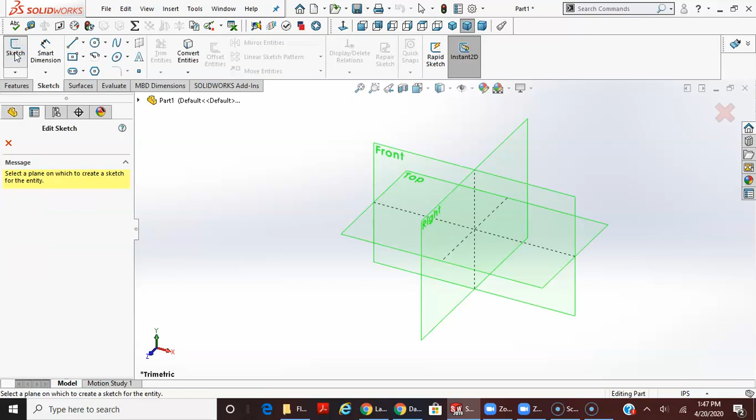Make sure I'm in inch here. And I'll start from the sketch. The orientation and the origin don't matter. For this one, I'll start with the line function. And I'm not going to start on the part origin. I'll just start off the part origin. And I am not going to make the fillets. I'll make the fillets on the bottom.

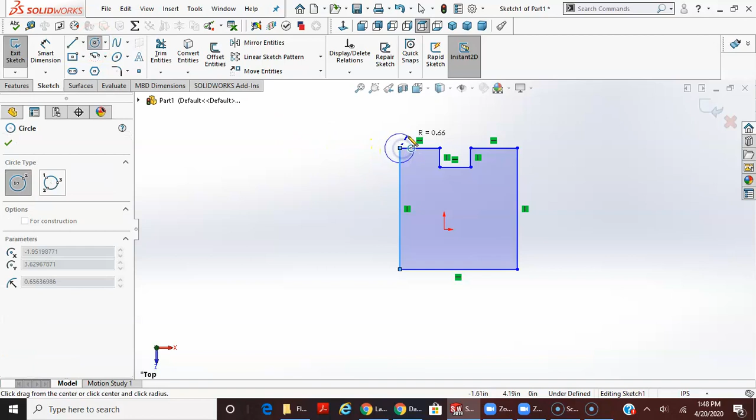I'm going to start with, again, the profile. And I think on this one, I'm going to make the slot like this and actually make just the rectangle like this. I'm going to go ahead and use the circle function to start. This might not be the best way to do it, honestly, because I'm going to have to trim this up. So we'll see, and actually I'll put another circle in there as well. So just like that, looks pretty good.

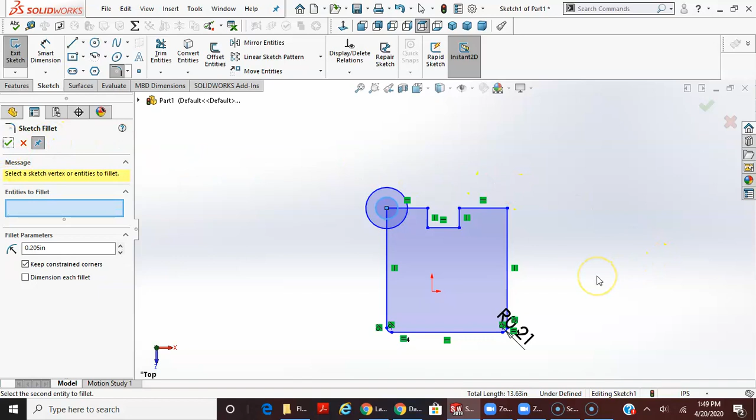And I'll use the sketch fillet function. The radius is 0.205 on the drawing. And I just select two lines. And that's pretty good. Now, even before I used the sketch fillet, I probably should have smart dimensioned the overall length here as 2.5, because now it's going to shrink a little bit. It's not too bad, so let's do it this way.

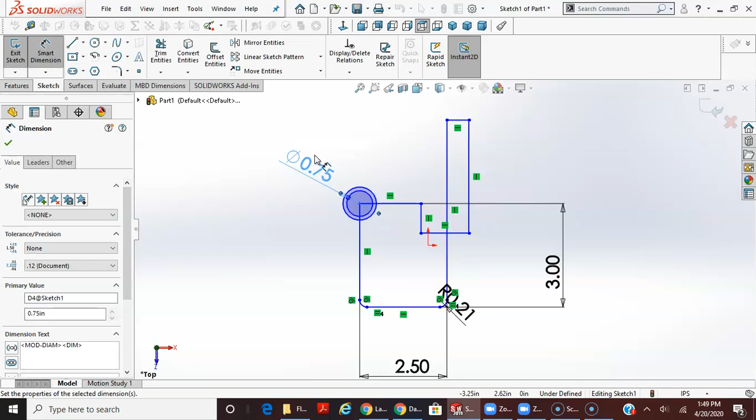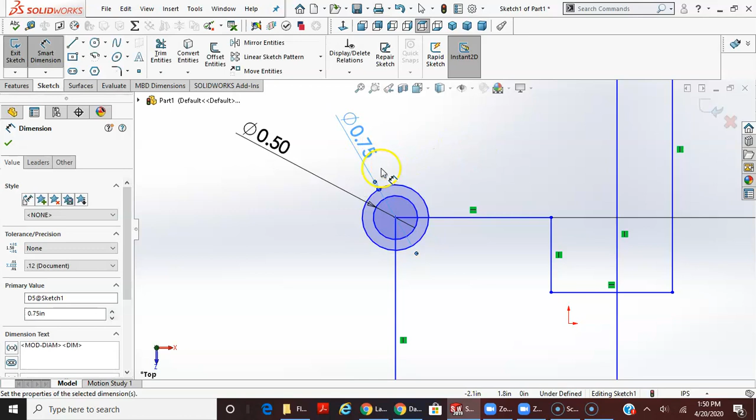I'm going to dimension the overall height as 3 inches. And then I'll go back in, and even before I move these lines, let's dimension these diameters. This is 0.375 times 2 is the diameter. This middle one is the diameter. Oh, I think I selected the same one. This is incorrect. This is 0.5. Well, I guess it doesn't really matter which one you're selecting. This one is 0.375 times 2, so 0.750. And then I have the overall height, the overall width, and then escape out of the dimension tool.

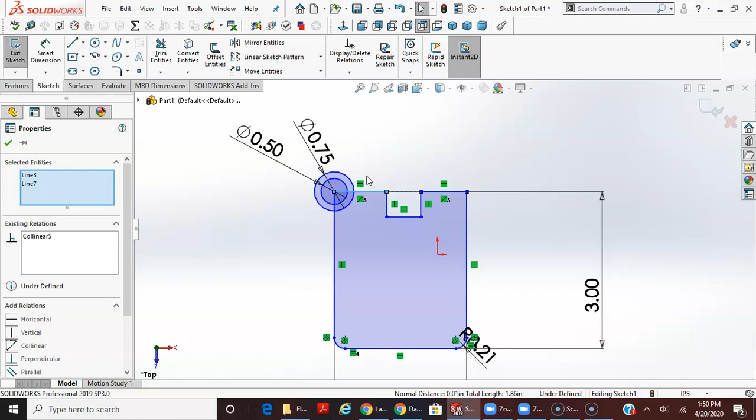And then I'm just going to drag this rectangle over and this line down. And I'm going to go ahead and make this line and this line collinear. And I'll add a center line from this midpoint here, and I'm just going to put it all the way up the length of the part. I will smart dimension this line length. This is a vertical line. On the drawing it's 0.250.

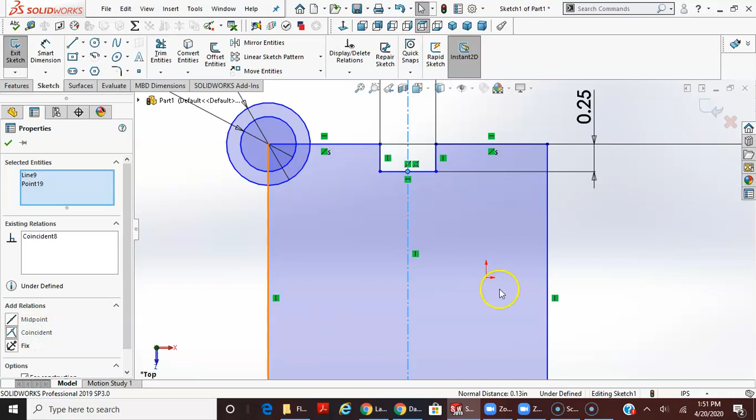And then this is 1/2 inch. And then to center the slot, I'm going to select this midpoint, hold Control down, select my center line, and make those coincident. So this is pretty good. This is kind of all I need, I believe. I am going to trim this up, though, before I fully define this. I think it will actually define okay if you don't trim it, but let's do this trim first. This could be a little problematic, so let's see.

In the power trim function, I'm going to drag, and you can even kind of look at the drawing and see what is the open area. This is open. This is open. And then these two lines also do not exist.

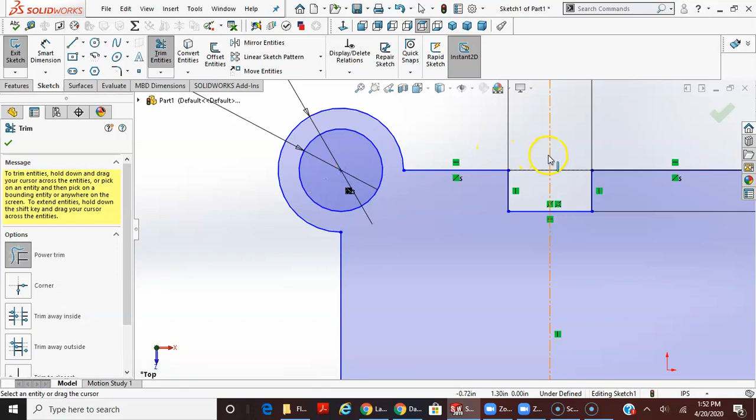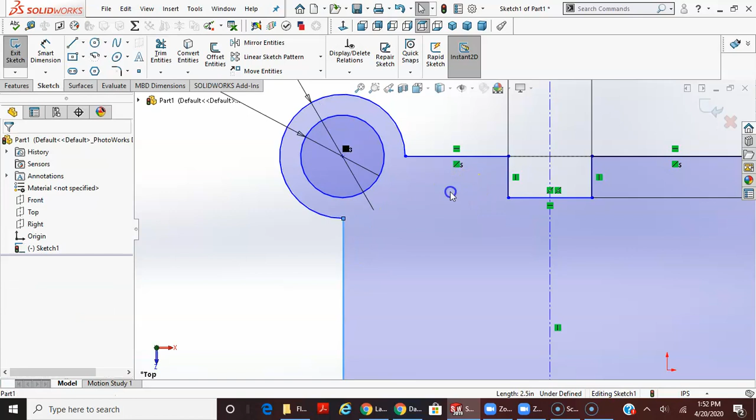Now I'm looking at this, and the sketch relations were eliminated as far as where this center mark is. And you can see I'm moving this around, and actually this center mark seems to not move from this line, but this line was moving. So I'm going to select this line and make this a vertical line and see, will it still move? I think it's pretty good.

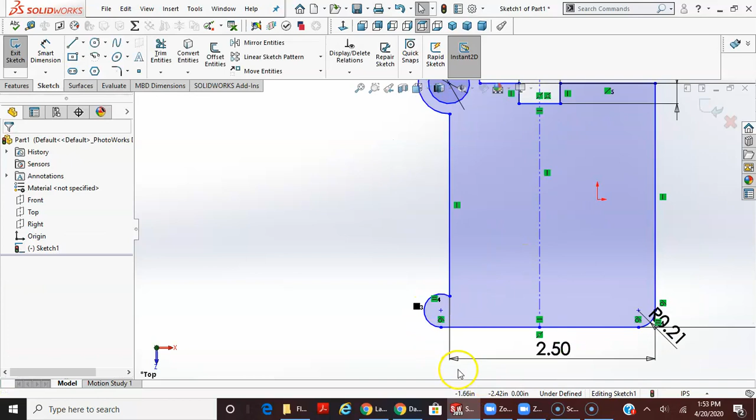The only other thing though is it did seem to change the size. I thought I had a dimension in there for the overall width. So let's add that again. From this edge to this edge was, off the drawing, 2.5. And now down here this looks a little wonky. Why did this move? This makes no sense to me at all.

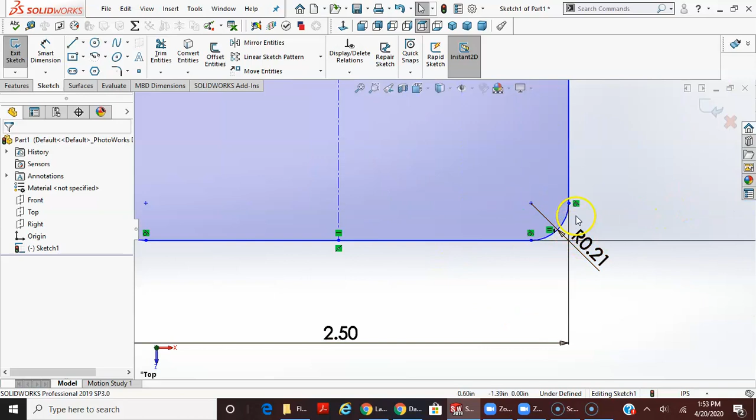Let's add this arc and this line as tangent. And this was equal radius based on the sketch relation. It's dimensioned here and both of these have tangency. So let's do a little screen fit again. I'll move these dimensions down so we can kind of see what this looks like in a better screen fit.

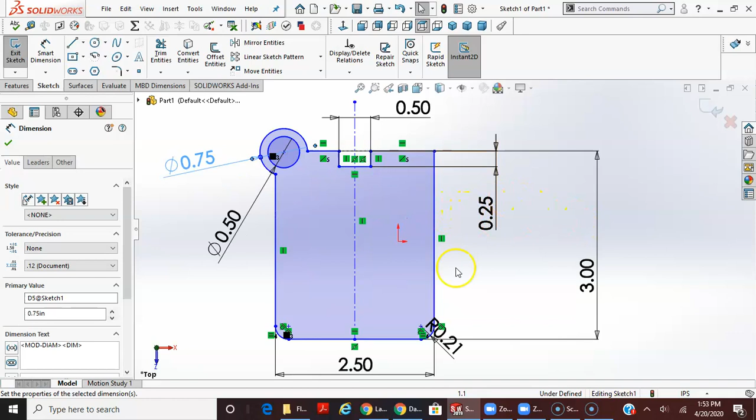Maybe not. Okay. So from here, I will locate this on the origin to define this. And let's see, if I select just this midpoint and this point, and then I'm going to make these coincident.

So it's still underdefined. As far as this edge goes, and this is going to apply on the midterm as well, this center mark, hold control down, this center mark and this line need to be coincident. These arcs are still blue, they're still underdefined. The diameter is defined, but if I move these up and down, you can see that this center mark also moves. So I'm going to add another one.

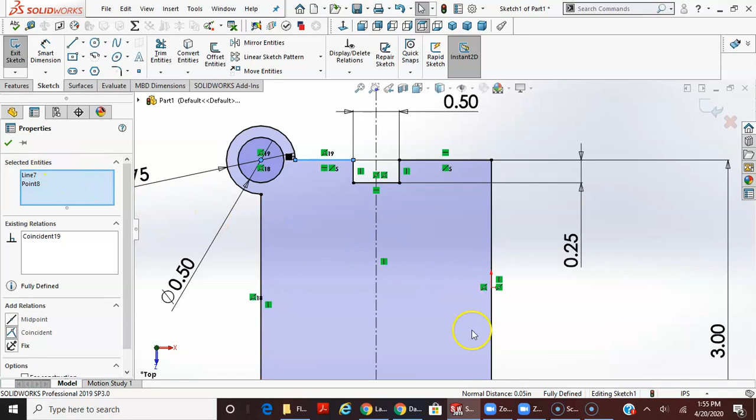It's the same as this coincident point, but I'm going to add it coincident to this top horizontal line. So I'm going to select point, control, line, and make these coincident. So now it shows down here as fully defined. The midterm has an issue like this, maybe even more than one. I think I've got a concave arc, a cutout here or on the other side, and then another circle where the center mark has to be tangent with this edge and this edge.

The position, the location of this arc and this arc is implied. They use the term implied, but you can see on the drawing that this center mark does line up with this edge. If you actually take your drawing, you can fold the bottom edge of the drawing perpendicular to the side edges, where these two lines are collinear, and then it will line up with this center mark both vertically from this edge and then horizontally from this edge.

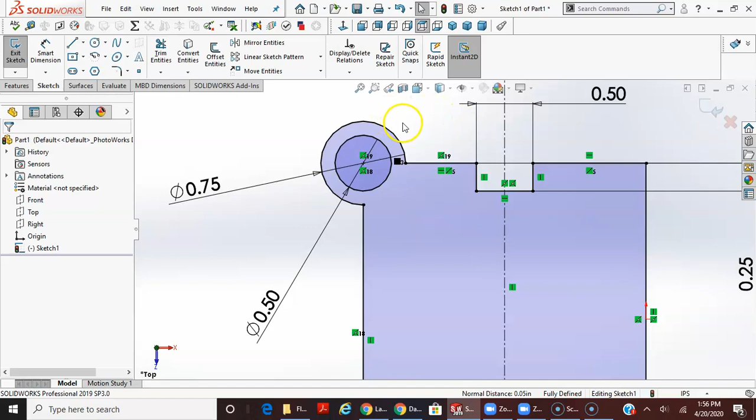I think I spoke a little bit about implied 90s. It's not necessarily implied in this case because it actually shows the center mark, and the center mark does line up, and that's how it's positioned. Both of these features, this inside hole and this outside arc, are positioned based on the center mark lining up with the vertical and horizontal edge. Okay. So this is fully defined.

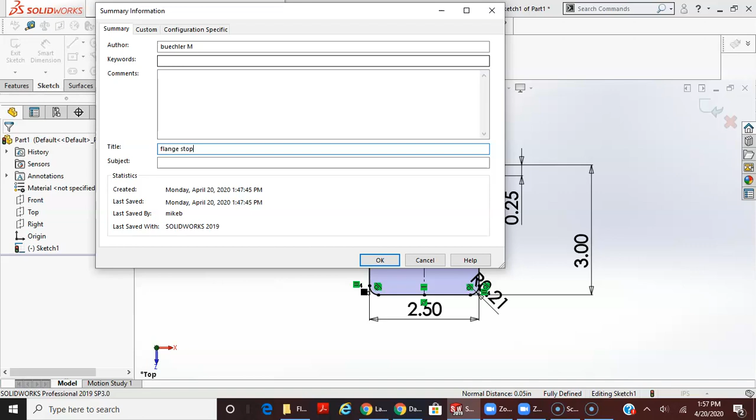This looks good. I'm going to make sure I have my summary information in here. I'm going to title this Flange Stop. And I'll just extrude from here. Features, Extrude. It shows a part thickness on the right side at 0.45, and done.

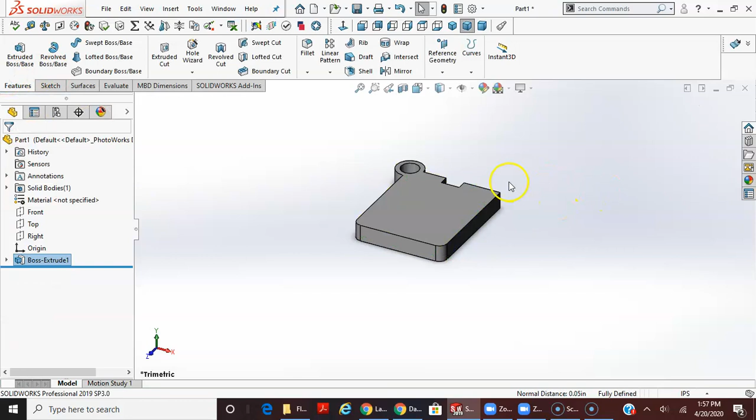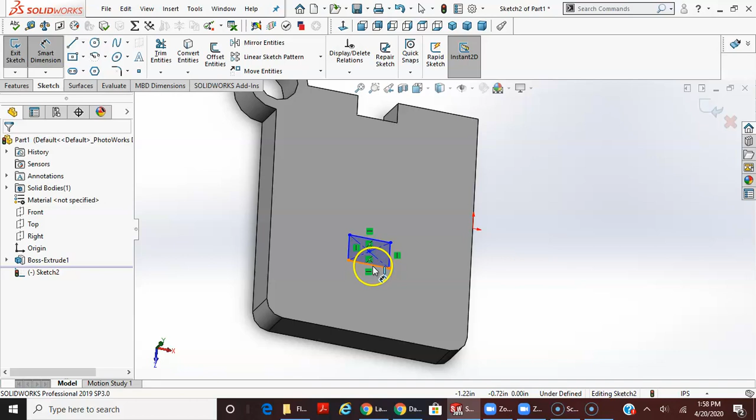Now let's do a sketch on this face, and I can do a rectangle. Let's do a center rectangle. I think I can get away with a center rectangle here. I'm not going to dimension the line length, because I'm going to add the fillets as sketch fillets. So I'm going to dimension it from one line to the other line, not point to point, and not line length, but edge to edge.

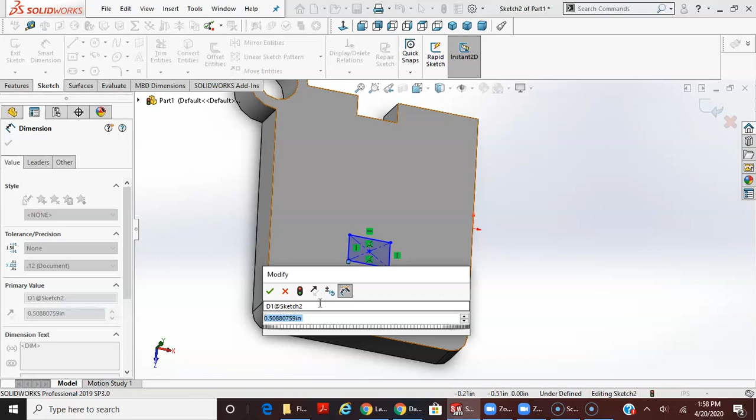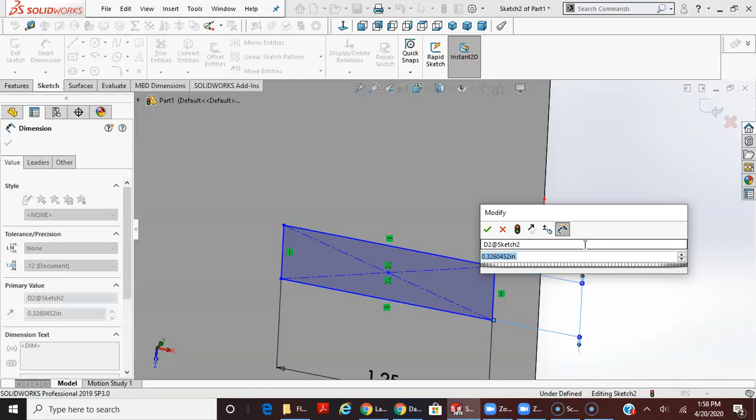1.25 off the drawing. And then the same thing here. Instead of dimensioning off of this line length, I'm going to dimension off of this edge to this edge. And this is shown as 1.25. And then I'm going to add a center line or construction line here from this midpoint. I'm going to make this construction line, this edge, and this edge symmetrical.

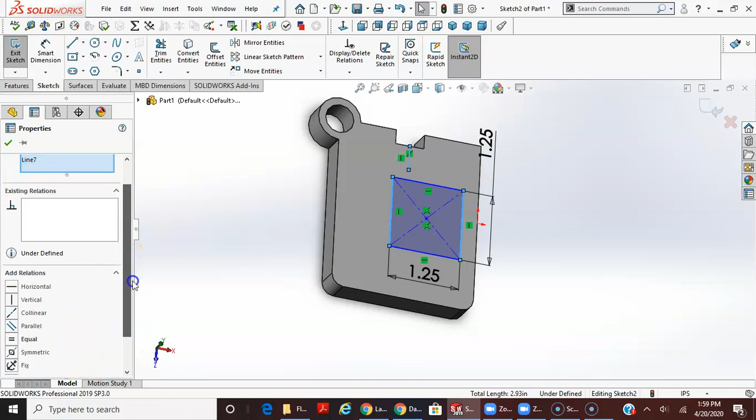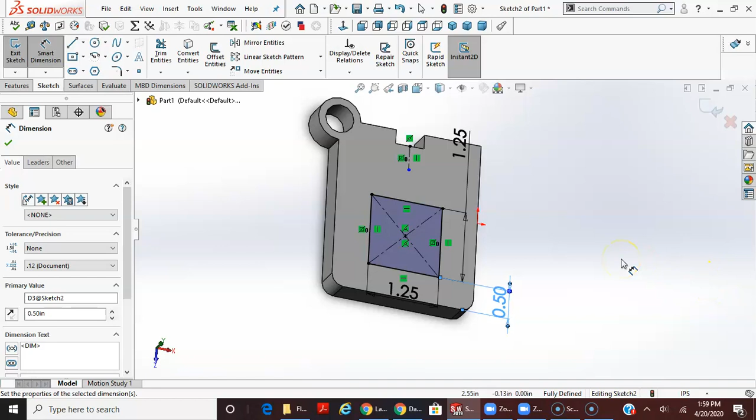So it is constrained now. I have two dimensions and this one sketch relation, so I can't move it side to side, but it can still move up and down. So there is another smart dimension from this bottom edge of my base to here, 0.5. And that looks pretty good. Now this is fully defined.

I think I had an issue with my recorder. I hope I didn't. Okay. Oh, come on. This thing. Okay. Yeah, it seems to be recording. So,

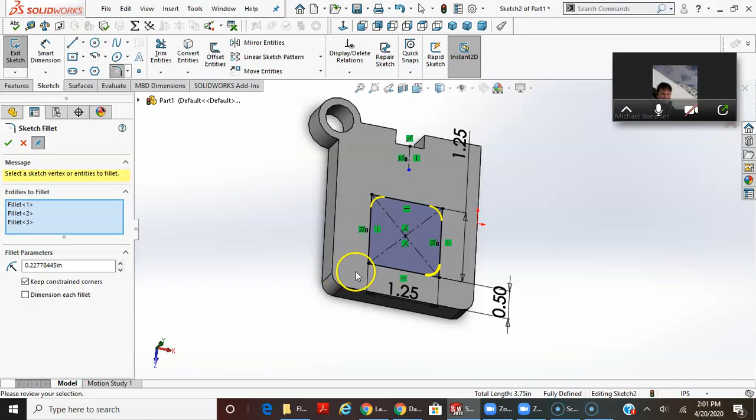I'm going to add the sketch fillet here, with a radius of 0.23. I think I dimensioned these edges a little differently. It's asking me to enter entities to fillet. Can I fillet the whole profile? Oh, edge to edge, edge to edge, edge to edge. Excuse me. Edge to edge. 4 fillets. That looks good.

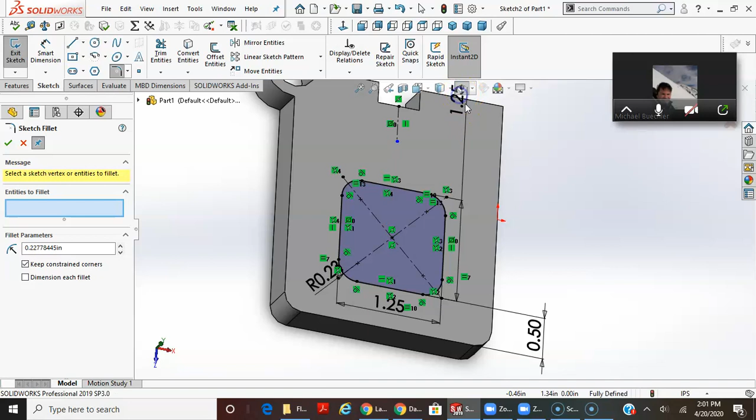You can see it added all of these tangent points, the dimensional size, and it maintained these dimensions of the size of the rectangle. Escape, so I can move these out here. So it maintained these dimensions, and this looks pretty good. Now, for this cutout, we've done this before. We're going to use a draft cut. So this is, again, fully defined here.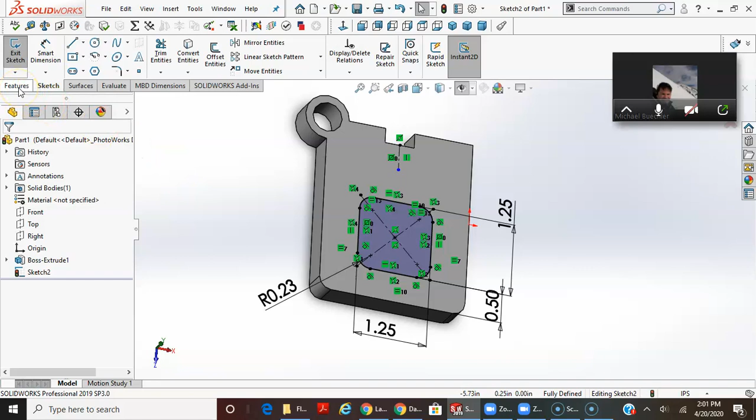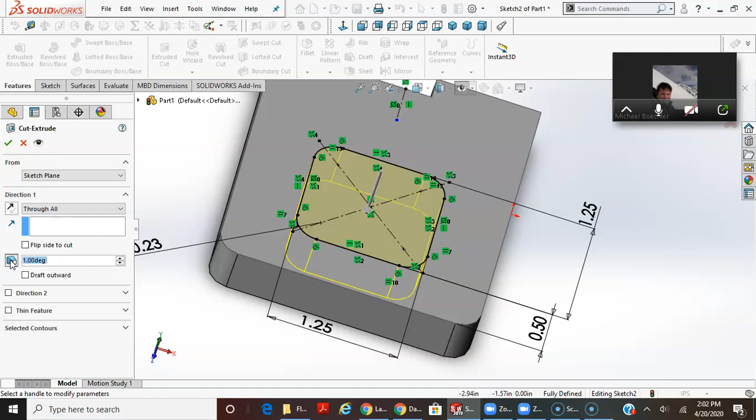In sketch mode, I'm going to select Features, Extrude Cut. The preview looks pretty good. It goes down through the extension. It's not blind, I'm just going to say through all. I'm going to turn on draft. This is the toggle on and off for draft, if you remember. And the drawing shows 25-degree draft. So the preview looks pretty good. I'm looking at this, and I'm going to say yes.

But on this particular one, you can see this 1/4-inch radius drafted down. You can see there is a little bit of a fillet here on the bottom, so it doesn't come to a square corner. So it does match what's in the drawing. If I go to a different view, is it the top view? Try this one. You can see that it does match the front view of the drawing.

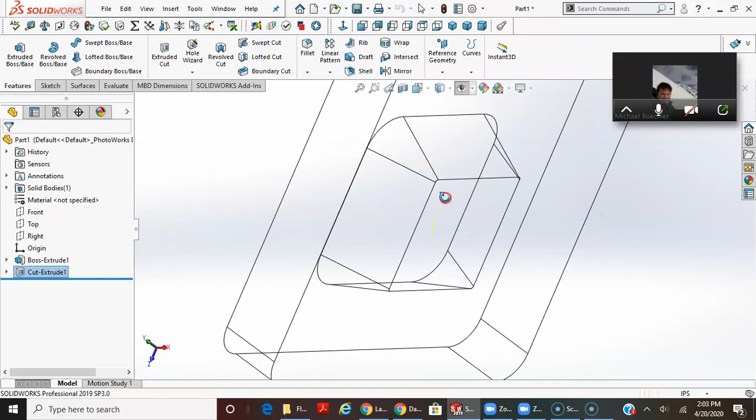And that gives you a real hint. If it doesn't match, you've got to be careful, because your part thickness could be incorrect. So there are other issues that could affect that as well.

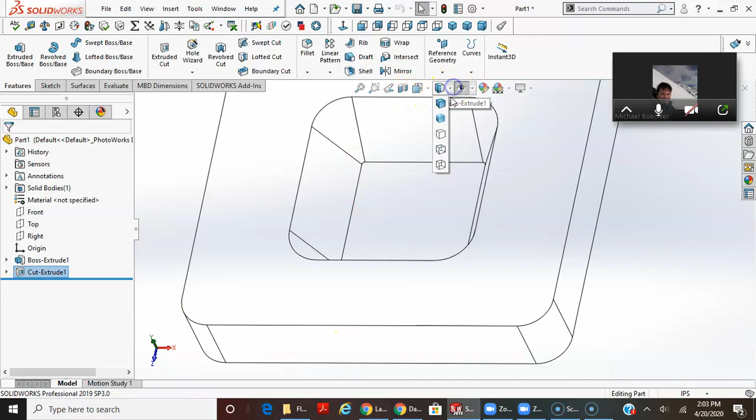Okay, so I'm going to go back and change my display to shaded here. And then I'm going to add some more. Let's sketch again on this face.

Let's actually not use that one. I'm going to get out of that. I'm going to use the hole wizard for this. So I'm going to escape and exit without saving.

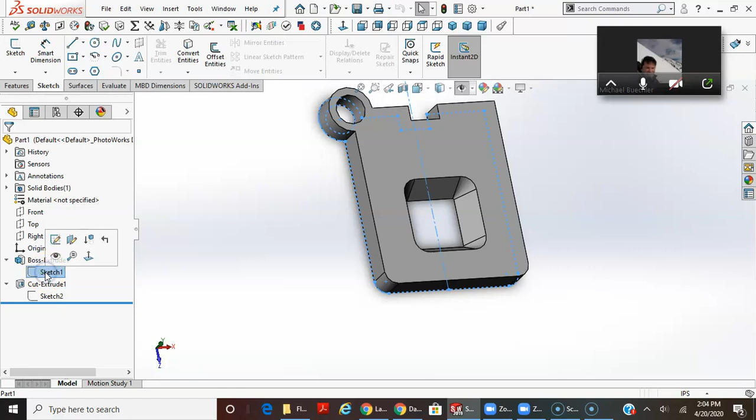So back to where I was. I've got my base sketch, I've got my cutout sketch. Let's use the hole wizard on these. You could actually do these in a sketch, but you'd have to do multiple sketches, and it seems like a little more work.

I'm going to go to Features, Hole Wizard, and then it shows a counterbore symbol, and it shows a diameter 140 through. The counterbore diameter is 250 thousandths with a depth of 200 thousandths deep.

So I'm going to select the counterbore hole, and the default goes to a threaded fastener, like they call it a binding head screw. I thought a lot of times you'll use a socket head cap screw. But I'm going to make a custom one here. I don't think any of these standard fastener sizes are going to work.

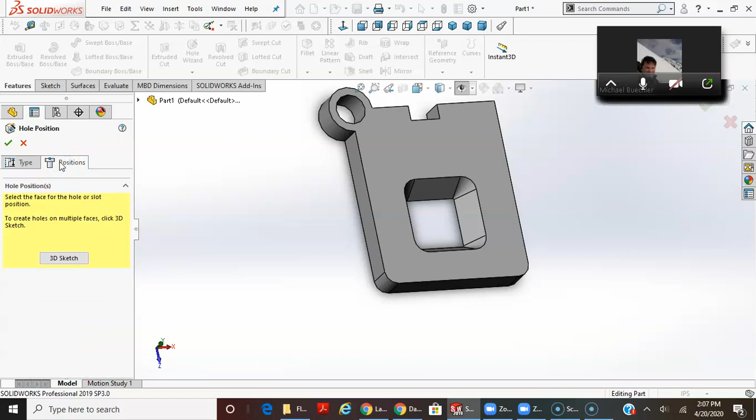So from here, this all looks good. The type, the custom sizing matches the call out on the drawing. I'm going to select now the Positions tab, and it's going to be on this face. Once I select the face, it's going to give me this sample here, and I can actually go in and wake this up here. If you bring this, you should be able to drag this around this edge and wake up this center.

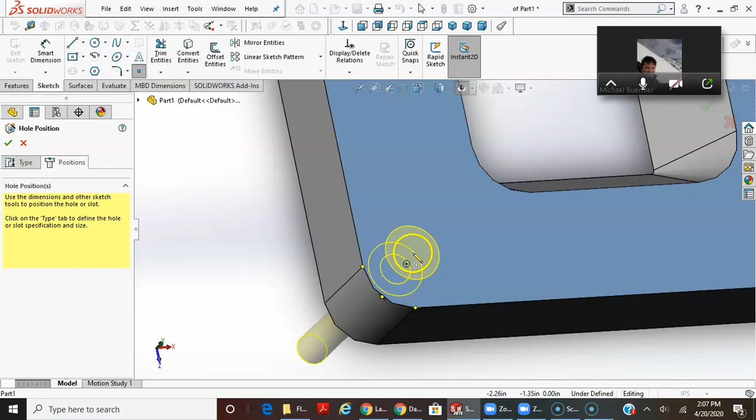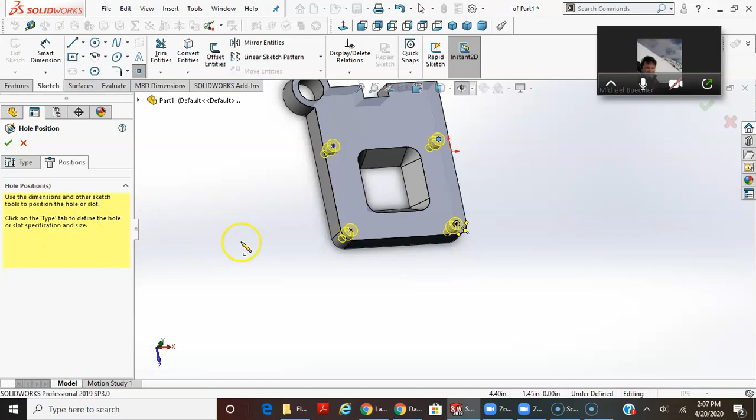And then I can make that coincident. I'm going to put another one over here. Same thing, I'm going to bring this along this edge and wake up this center mark. And then these, I don't have a reference. I can get to here and I can get to there, and they're equal to each other, but I still have to go in. I'm going to say yes.

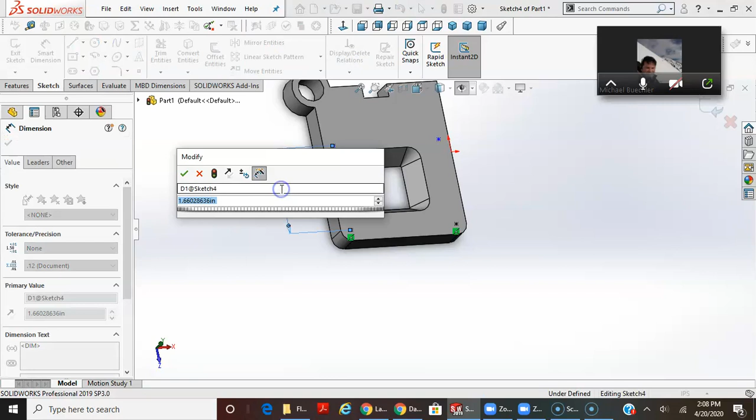I still have to actually go in and open sketch 4. So I'm going to edit sketch 4. These two bottom ones are defined, and I need to just add a smart dimension from point to point. Off the drawing it's 2 inches in this direction. And then in this direction, let's see here, this point and this point.

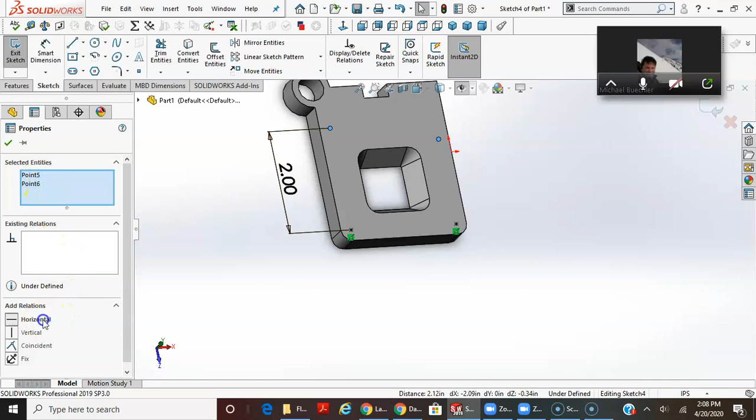Point 5 and point 6, I'm going to make these horizontal. It's still blue here, and this point, hold control down on this point. It's weird because it didn't show that as being selected when I was clicking on it as vertical. I'm going to say yes. I'm not sure why, I can move this up and down. I'm going to make this one and this one vertical.

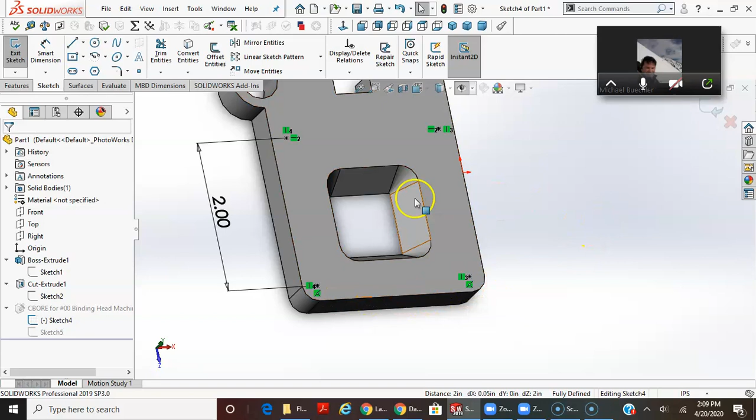There, so I didn't add another dimension, I didn't add this same dimension. I just made these horizontal or vertical to these other defined hole positions. So this looks pretty good. I'm going to say yes. And sketch 4 of my hole wizard is defined, so that looks pretty good.

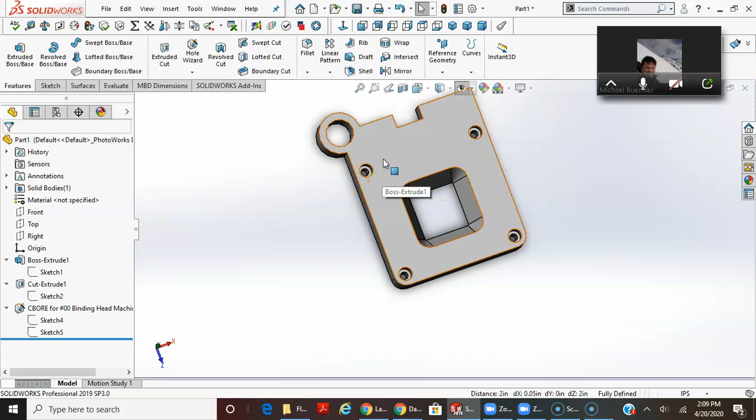Again, I'm not going to mark you down however you want to make these. If you want to not use the hole wizard, that's fine. I suppose you could have done this with the base sketch. We could have added these holes with the base sketch and then maybe added the counterbores as another entity, like another cut entity as 4 extruded holes based on the through holes from the base sketch. So that's another option.

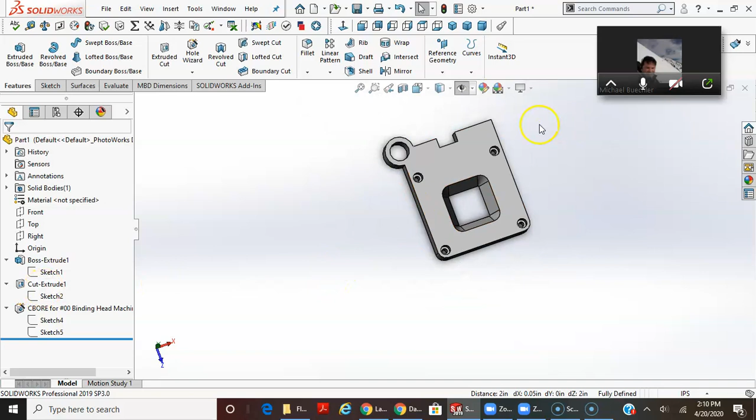So this looks pretty good, these are all defined. I'll go ahead and save this before I get too deep into this. Let me save this as last name, first initial, Flange Stop.

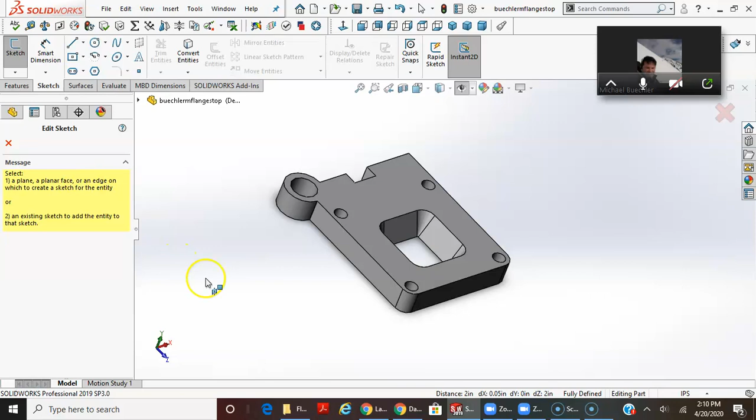Let's do the slot on the side. I'm going to start with a sketch on this face, and I'll use the rectangle again, the center rectangle, like this. I don't have filleted edges on this, so I can just use the smart dimension for the width of the slot. Let's see, where is the width of the slot? On the right side view, it shows 1/2 inch, and then this line length is 0.125.

There are linear dimensions from this point to, can I get to this edge? This is 1.105.

And then I'm going to add a center line. It shows a center line running through the length of this part. And this is symmetrical. I can actually do it a different way.

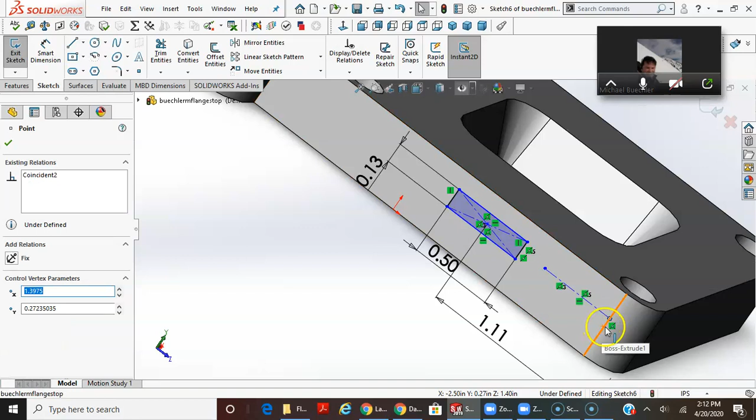I can make this midpoint and this point, or this line, coincident. So I can't move that. Let's see, I can move. Oh, the slot isn't connected. The center line isn't connected, which is kind of weird. So I'm going to go back in and make this point and this midpoint coincident. There. I'm not sure why that wasn't coincident to begin with, but that defines the location of the slot.

So from here, this all looks well and good. I'm going to change this again just so you see the dimensions accurately here.

Let's go to File Properties. No, Settings, Document Properties, Dimensions. Let's go to 3 place decimal. Okay, and now you can see these dimensions do reflect exactly what's on the drawing.

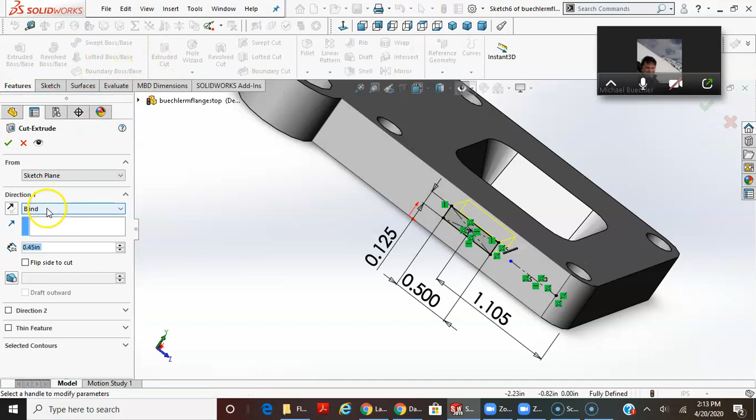This again is fully defined on this sketch. So I'm going to select Features, Cut, and through all. I'm done.

So that looks pretty good. This is exactly what we're going for. It's cut through both sides of the slot.

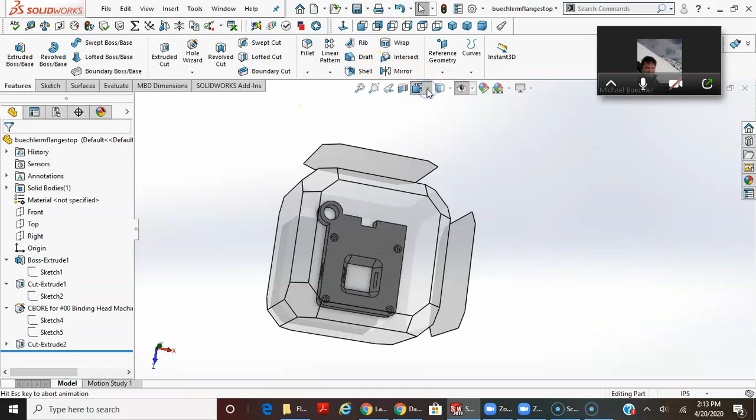Another way to view this, and you want to do this on everything you make, you want to go in and change your view orientation. I'm going to show hidden lines visible, and really look at this. Does it match visually what you see on the front of the drawing? Of course, this one doesn't have the dimensions there, but this is how you're going to get used to seeing the part, a 2D representation of a three-dimensional part.

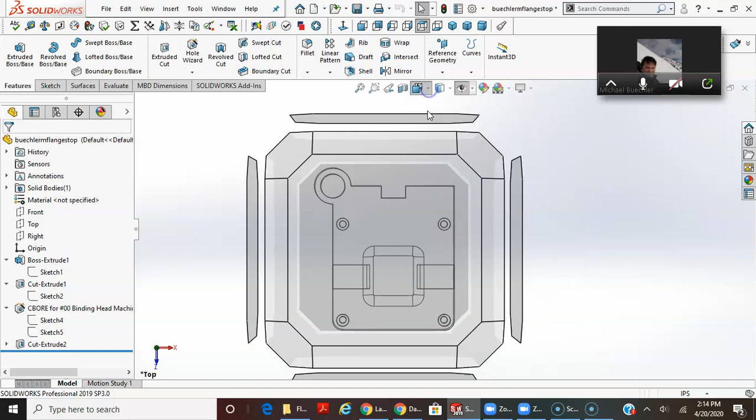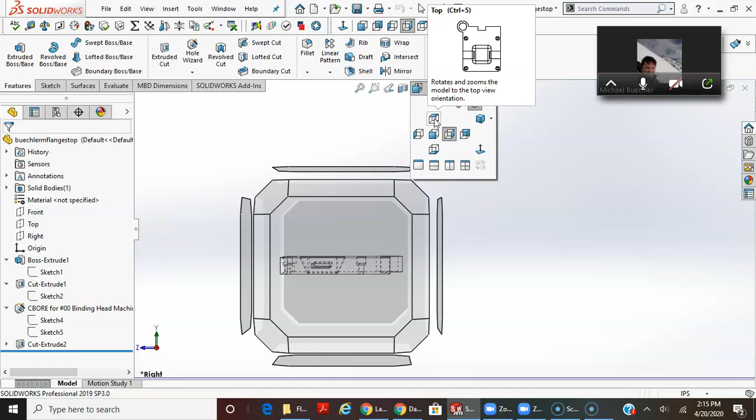I'm going to change the view orientation again. Let's go to this view. What about this view? No, not that one. Let's see, front, right, bottom, front. This one, the right side view looks a little wonky because if you notice, the way I did the original view is not top. So the default orientations do matter as far as the default views go.

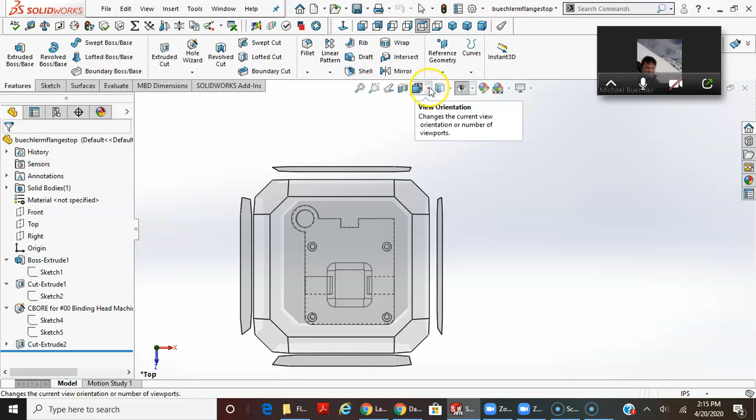So now that we've gotten a little more advanced and you're more comfortable in the software, you can start thinking about where do you want to start for your default view orientation. What default plane do you want to start with? So when you go to a different view orientation, it gives you exactly what you need. Now, I don't necessarily need this to be a particular way because I guess I can always just move my drawing and look at it in relation to where my drawing is. And this looks pretty good.

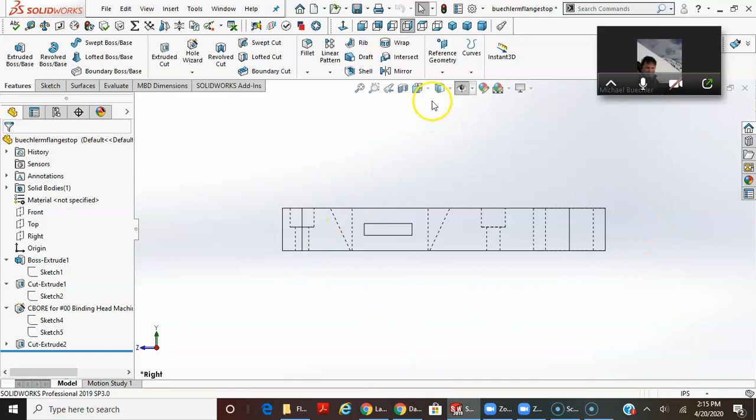So I have one last thing left here to do, and that is the threaded holes. I'm going to use the hole wizard for this as well. So from the Features tab, I'm going to select the hole wizard, and let's select the straight tap.

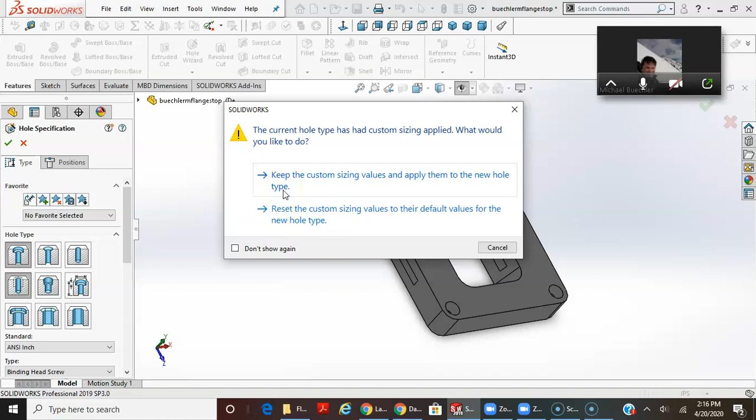So let's look. Dun, dun, dun. It should have a depth here. Oh, the depth is the default. Let's see, yeah, it says through all. So once I select blind, it gives me options for the depth, and you can see this shows the hole depth.

And it should, what does it say? Blind hole depth. And this should say thread depth, or it says tap thread depth. So this value is going to be 0.375. And when I press enter, this will probably change. See, it changed from 0.54 to 0.48.

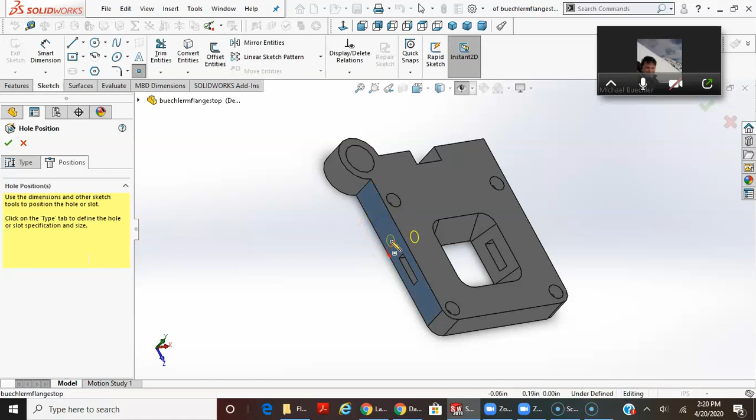So now this all looks good. The type, so I'm going to select positions on this face, and then I'll put one here and one here.

I'm going to say yes, and then go back in and edit the sketch. I think I have to do 2 center lines. Let's do a center line here, and let's do another center line here.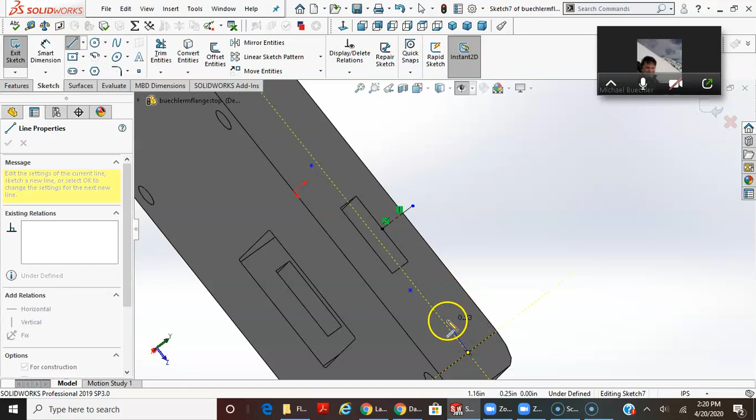I'm going to make this hole location and this center line coincident. And this hole location and this hole location, vertical? No, horizontal.

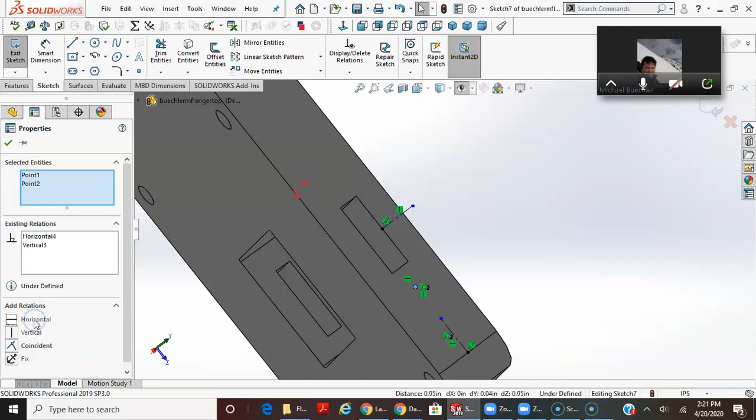Uh-oh, let me go back. If you're not sure if you're in horizontal view or not, you can do it this way. Let's go Normal To. How about here? Normal To, okay, so now I'm normal to the sketch that I'm in.

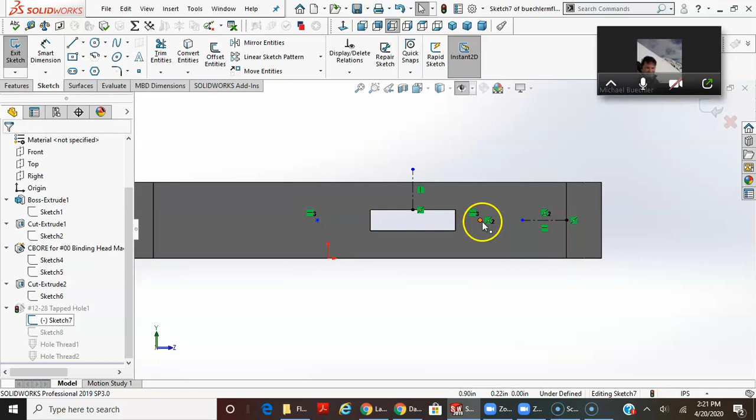I'm going to select again, holding Control, point 1 and point 2, selecting both points. I'm going to make these horizontal. Now this point, hold Control, select these 2 points and the symmetrical line, and make them symmetric.

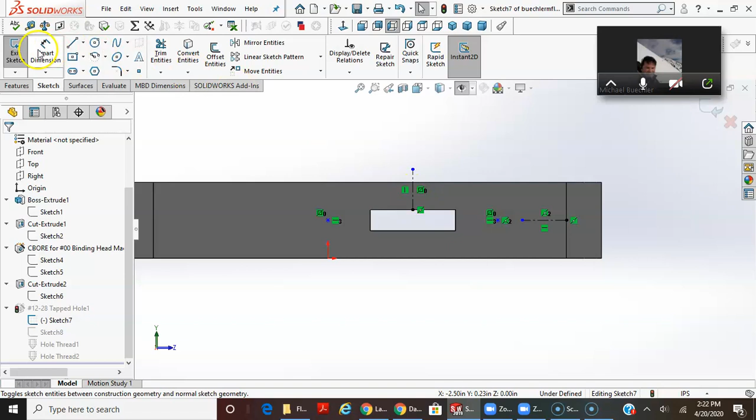The only thing missing, they're still blue, they are constrained. I can't move them side to side, and they move equidistant in and out from symmetrical to this line. So there's a smart dimension from point to point that will be constrained as a horizontal dimension.

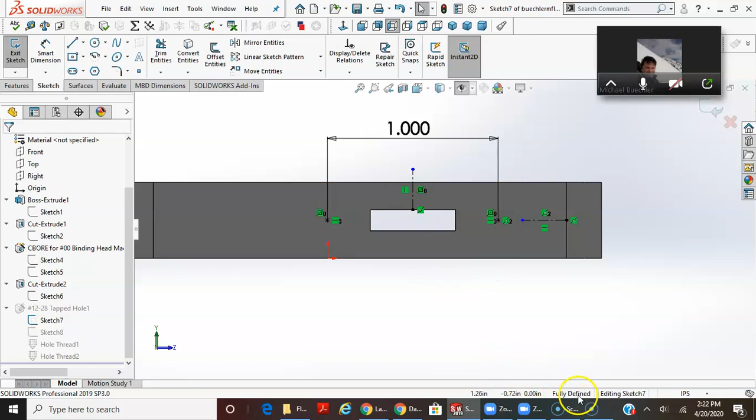Off the drawing, it is on the left-hand side, 1 inch. And done, it shows now down here fully defined. I'm going to say yes. And that looks pretty good.

Dun, dun, dun. Did I? The cosmetic thread is not turned on. Huh. Let's try it

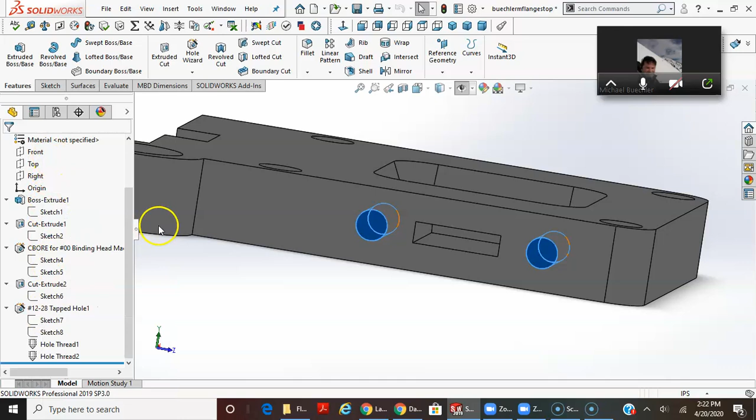This way, with a little bit smaller, that way. The other way to look at this, so it doesn't matter as far as the view. I think, where did we have that view?

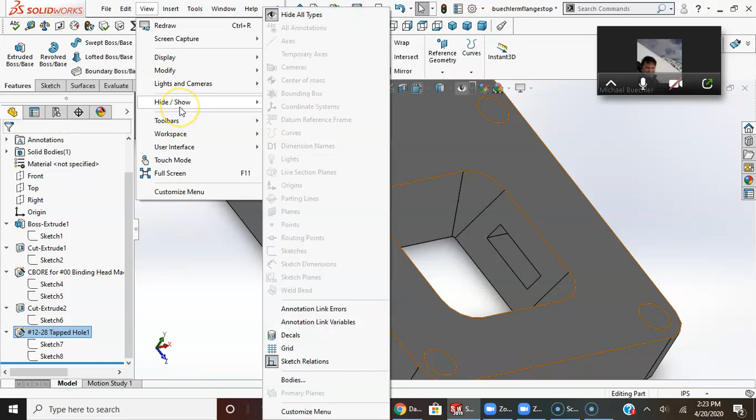Cosmetic thread turned on, I forgot where that was here. Just make sure it's shown within your feature design tree as a #12-28 tapped hole.

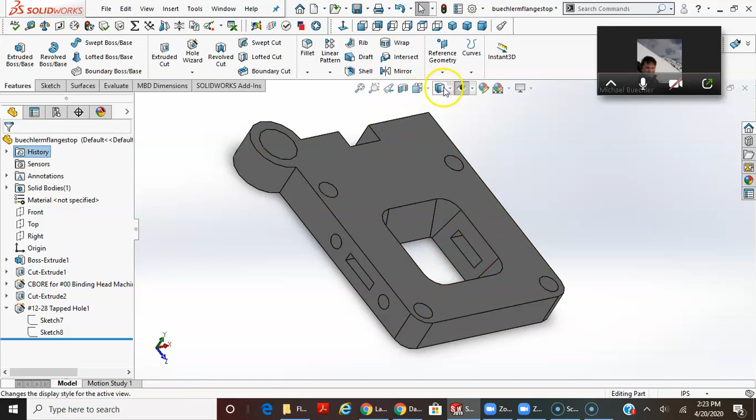Now, the other thing, now that we're done with this, go back into this view. Let's go back into the hidden line view and then look at the front view again. And it shows a pretty good preview. It's a little bit different in the drawing.

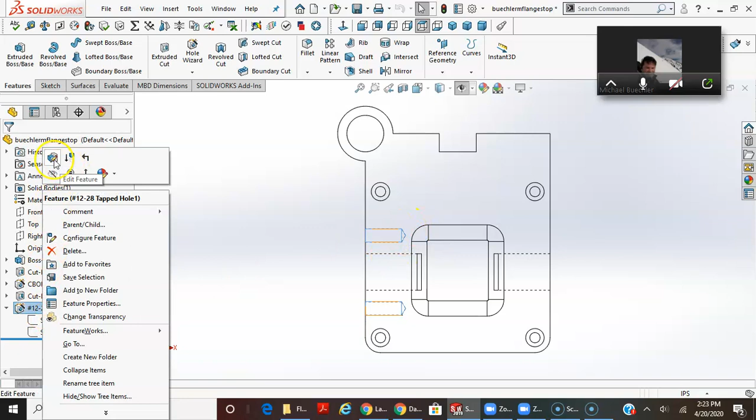So if I actually go back in, let's see if it appears different if I go back in and select. It doesn't display any different. What about this way? Does it display different? If I edit the feature and then do this.

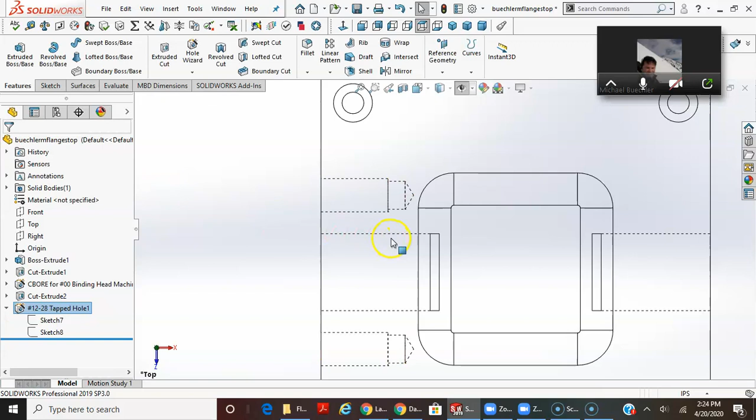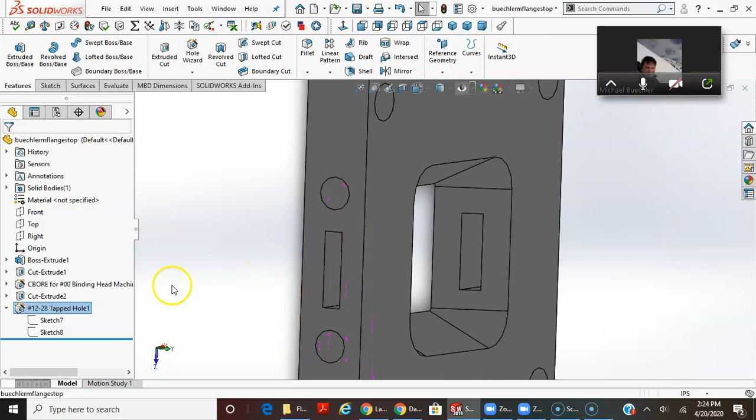Yeah, that shows it with the dashed lines, with the threaded material removed. But if you go to change the display style to shaded, it shows it as a larger hole, which I don't particularly like. I would say leave it like this.

I'm done. So this looks pretty good. Oh, it does not look good. Oh yeah, it does. It's weird because when you rotate this, let's see if we can do this.

If you rotate this, it looks like the bottom of the hole is shaded gray. Do you see this? And that is the shade from the part. If you flip it over, it shows the background is white.

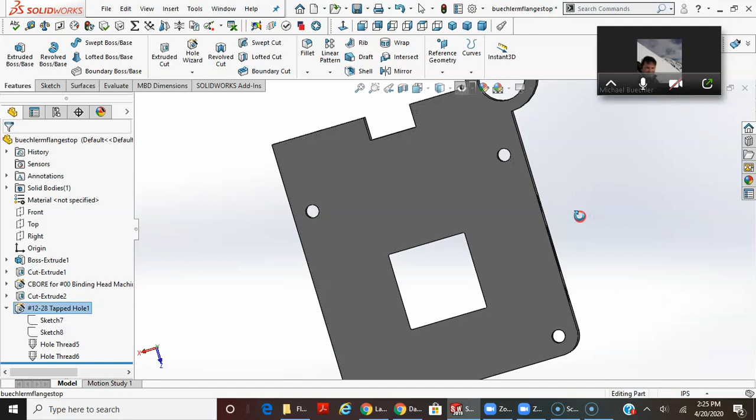So those holes are through holes. So I'm not sure, it's a little bit of a graphics issue there that I'm not a big fan of. I wish it would show the bottom of these holes as white and through.

All of my sketches are fully defined. I've got the correct file name, with my name starting at the beginning of the file name. I have the summary information in there.

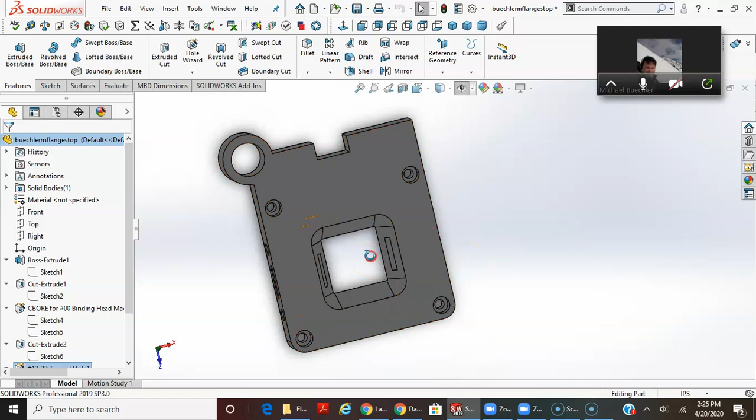Your midterm will be pretty similar to this. The only thing I think on the midterm is I have you do, there's holes on it, but there's no requirement to do the Hole Wizard.

So this one is not in the book. If I didn't mention that, sorry. PDF drawing is available.